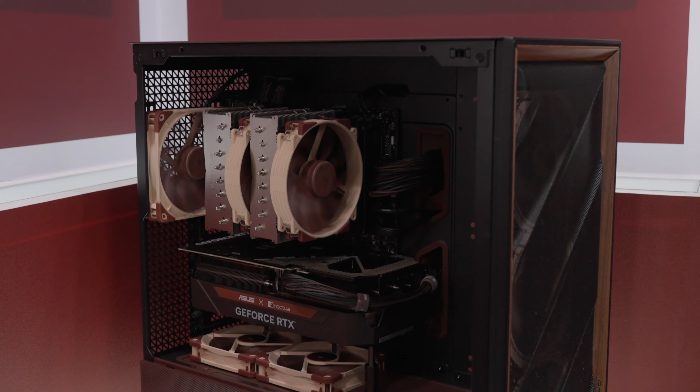I'm here with Attila at the Computex Expo for the Noctua booth. Yeah. So Noctua has been making fans for a very long time. One of the reasons why the A12X25, the first gen, was so successful was that it was the first fan on the market ever to use liquid crystal polymer.

When the fan is spinning, it can expand, and if it expands, it can touch the frame. If you don't have a tight tip clearance, then you can actually have air coming back. So this is how you lose performance with the fans. But if you have a rigid material, then you can achieve this very tight tip clearance.

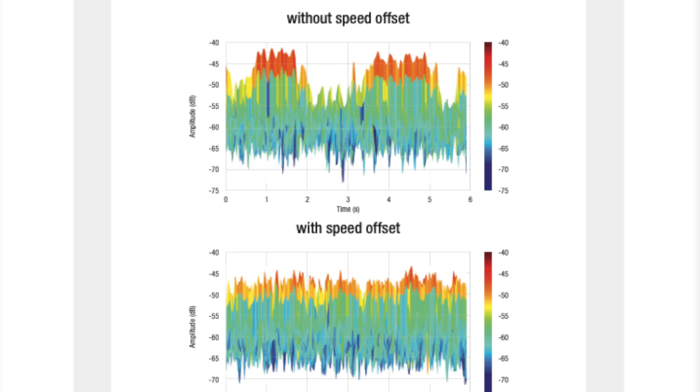If you have two fans running at nearly the same constant speed, you would get this harmonic effect of these noise peaks joining, where you would get this wow, wow, wow humming effect. We are also not just measuring noise, we are also getting into the psychoacoustics of how a person perceives noise.

You can have a really high-pitched noise which is lower in the noise level, but it's a high-pitched noise which will be more annoying than a deeper tone. Some might find it shocking that Noctua, the king of air cooling, is doing an AIO, but here it is.

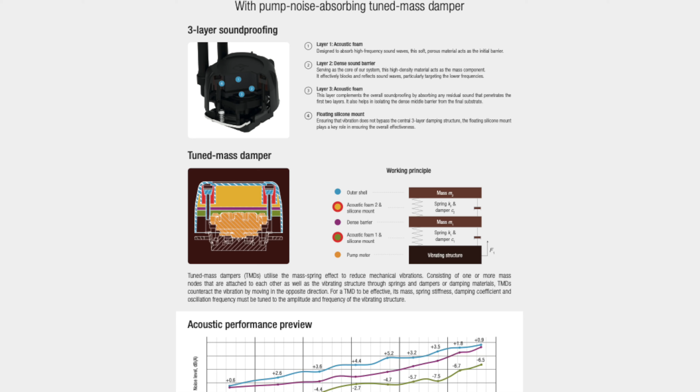We are doing 3 layers of foam. So while one layer of the foam acts as a spring, the other layer of the foam acts as a mass, and it counteracts the vibrations from the pump, and also the entire housing is suspended on these silicone mounts, so that no direct vibrations are transferred onto the housing itself.

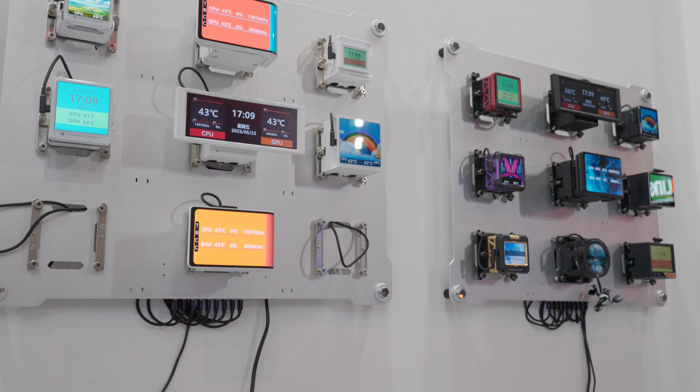If the housing gets some vibrations, it might resonate. This is the reason that if you just put a housing and a screen on it, you will get more noise. So we are trying to do the opposite. So we were talking about the limitations of having a pump on the CPU block and the noise that it can generate. So how about we ditch the pump entirely and we go to the thermosiphon?

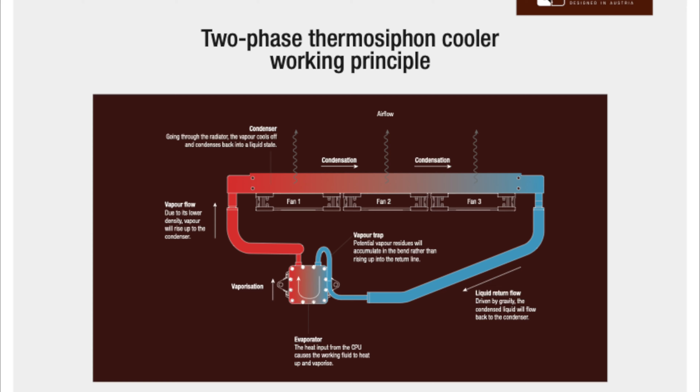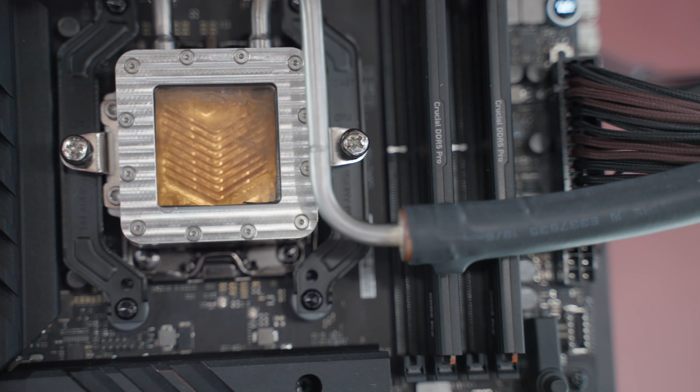A thermosiphon uses gravity and evaporation to passively cool components, so that means no pumps and no power needed. Here we have a working sample cooling a mainstream AMD 9800X3D chip to show what kind of challenges we are facing with two-phase cooling.

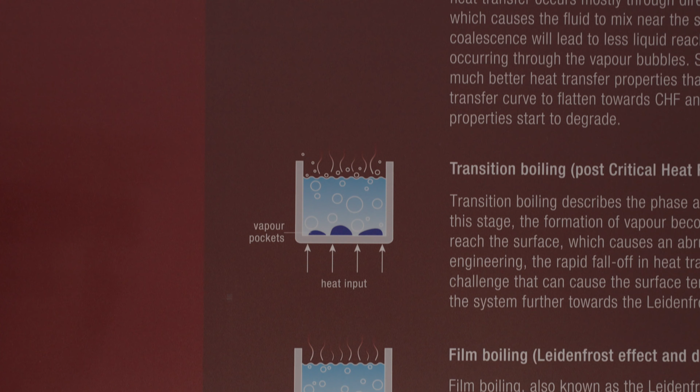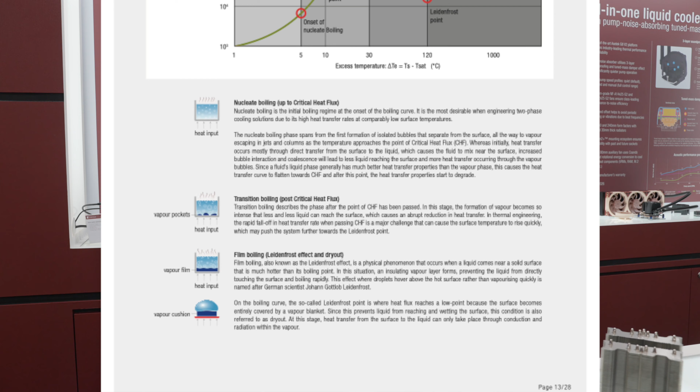If you ever dropped a drop of water onto a hot stove, the vapor underneath is stopping the water from evaporating. This is also what we are facing with hotspots of the CPUs. The bubbles would be stuck between the fins, and then the working fluid, which is cooler, wouldn't be able to get to the heat source itself, and you would just get no cooling.

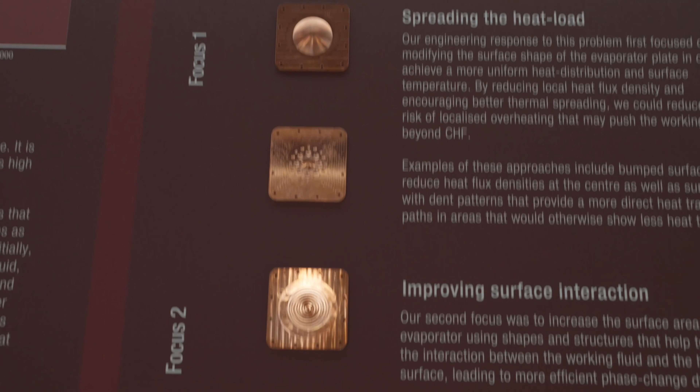It was my understanding as well that it has to be upright. This is dependent on gravity, so the condenser has to be up so that the coolant can do its circulation. There are many challenges: figuring out what is the best coolant, figuring out the cold plate, and also the radiator structure itself.